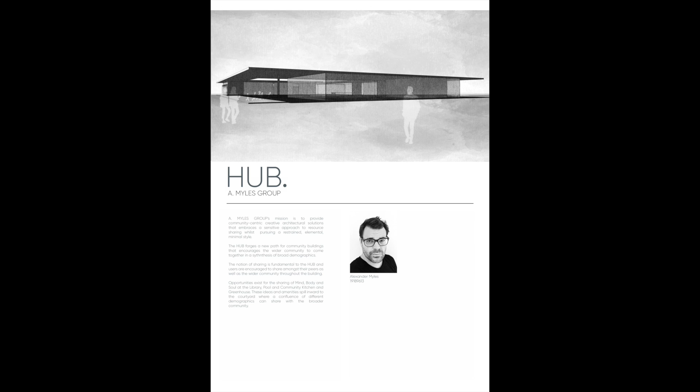I really started off this phase by taking a close look at what community really means, and I stumbled across this analogy of a waterhole that I found really quite powerful. The idea of all these animals coming together to share water really made me think about the idea of sharing in the community and how important that is.

I also started to initially look at some precedents of community hubs based around the concepts of amenities, transparency and circulation of movement, and how important the landscape is.

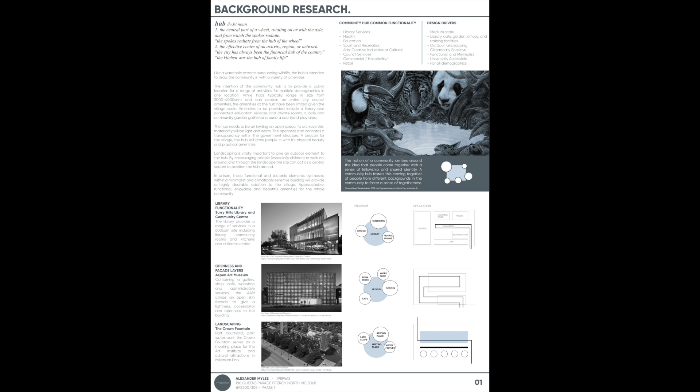When I went back to look at the notion of community, I was really drawn to the idea of sharing and how that could impact on society.

It made me begin to question what we as a community should be sharing, and I started to play around with the idea of a fully resolute capacity for sharing based on body, mind and soul. This was because I wanted to include as many demographics as possible in my community hub and not leave anyone out. Sharing can impact lives in a profound way, and by sharing with the largest number of the community possible, this was going to be the most beneficial way to help everyone.

I started to come back to the idea of the waterhole as a means to draw people together, and I looked into the way that water has a psychological draw to people and how this might connect with my landscape.

I started to look at the movement of water, how it could be both calm and reflective, but also encouraging for movement and exploration.

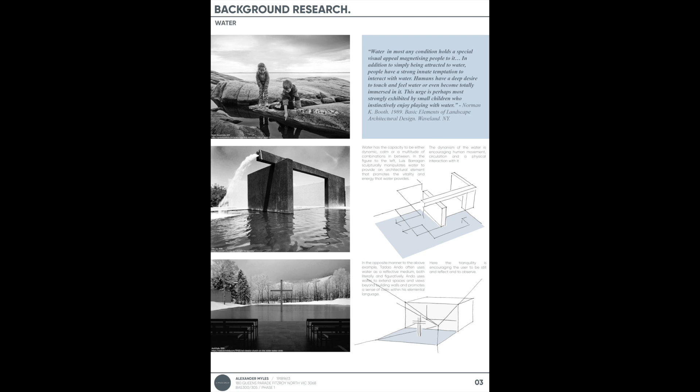With these ideas in mind, I then looked more deeply at precedents of other community hubs, also libraries and sports centres. What I found was that these complexes are often very large, between 2,000 and 4,000 square metres, but secondly, they're also very public with very few private spaces.

I also started to appreciate the various amenities that would be required outside of the three specific spaces I'd identified, being a library, swimming pool, and community kitchen and garden.

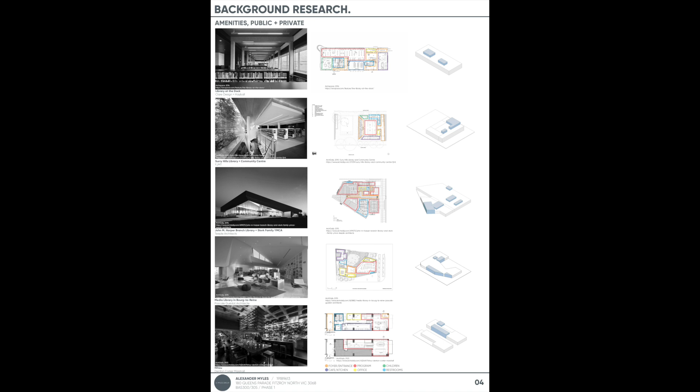So by taking these three concepts of mind, body and soul and translating them to the physical amenities of a library, swimming pool and kitchen, I began to look at how they might fit together, and how the joining of them, the sharing of ideas and amenities, the coming together of different people with different interests, was of utmost importance to my hub. It was this centralized sharing that I tried to focus on, trying to bring all these people together as one.

The central courtyard became a focus, and this relationship between different groups to have something for everyone, so everyone had a shared experience.

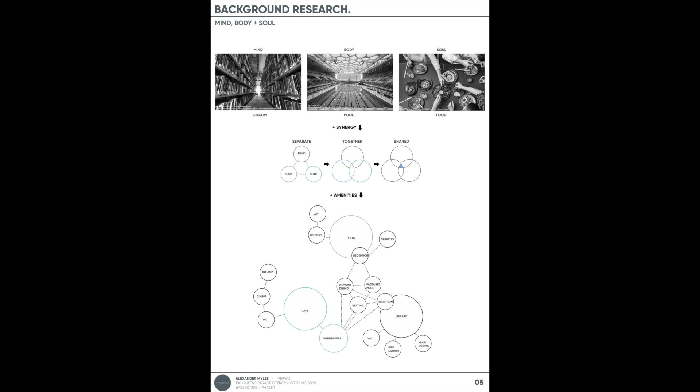With this research behind me, I was able to use this knowledge and precedents to plan my space. As a large complex, I really tried to keep the scale of design feeling as small as possible to foster a village feeling. Creating separate spaces for each of the main amenities was a simple way to achieve it.

It then allowed me to look at ways to bring the people drawn to these different amenities out into a central courtyard with shared amenities of a communal eating area, a large seated area for reading, relaxing and socialising, and a wading pool for children.

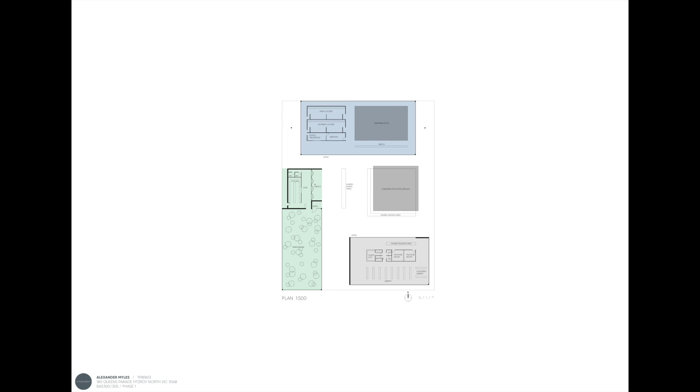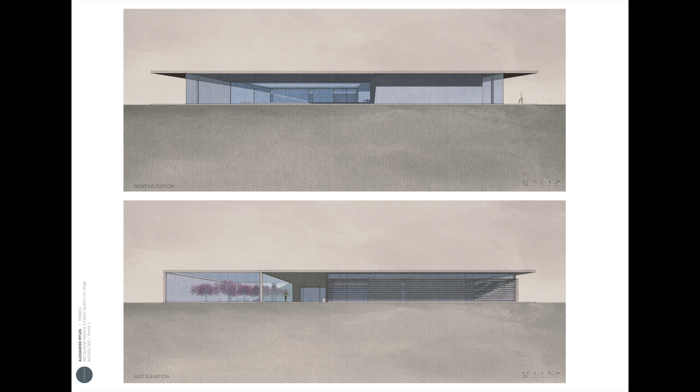I really tried to convey in my elevations and also my sections this idea of depth, that the building is not just exterior walls, but a portal through to another space, a place of sharing, a place for everyone, and ultimately completely accessible for everyone in the community.

For my final drawings, I wanted to try to bring together these ideas of circulating space, how these spaces were related, how they were distinct, and also how they melted into a single shared space. I really wanted to show through my research of precedents, the common amenities the space really has, and the volumes required for activities, and the reasoning behind the design's form.

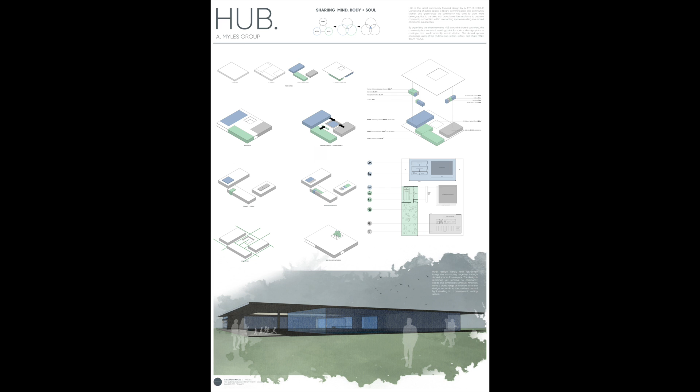Just to finish off, I've included some images of some of the models that I've done over the course of the last 4 weeks, just looking at some of the massing and concepts that I've done, including my final design.